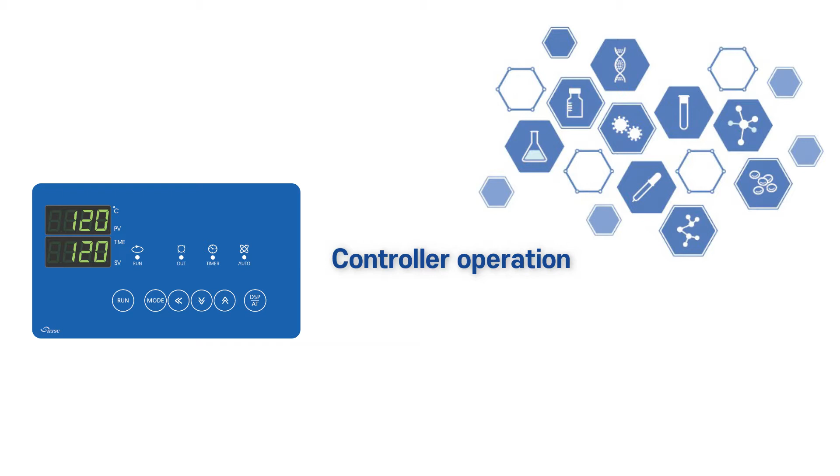This is a guide on how to use each function of the controller. It is a PID controller that is capable of precise temperature control. It is possible to set both temperature and time.

The upper screen displays the inner temperature. The lower screen displays the set temperature. The run lamp displays the operating state of the equipment. The out lamp displays the output state of the heater.

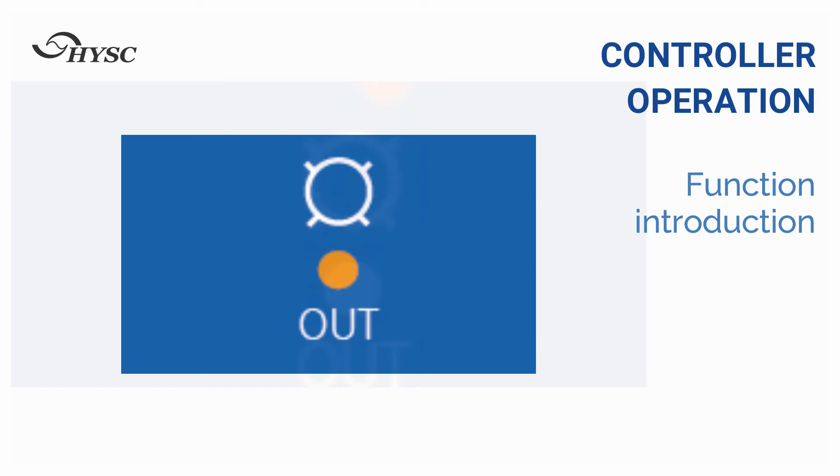The timer lamp displays when the time has been set up. The auto tuning lamp displays when the auto tuning function is activated.

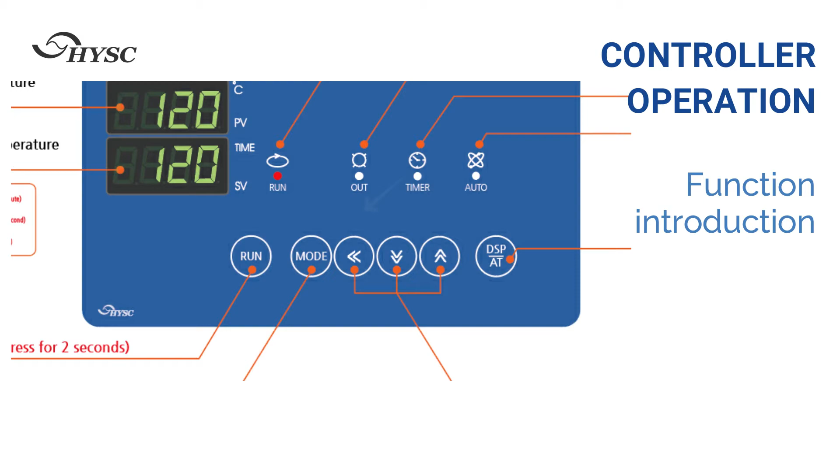The run key is for running and stopping operation. The mode key is for selecting the mode to set temperature and time. There are keys for changing and setting values. This is a key for shifting the digit number, and the other keys are for setting values.

The DSP and AT key is for checking time or running auto tuning. You can check the remaining time by pressing the DSP button during operation if you have set up the time. The AT function is for restoring the original accuracy when you have replaced parts.

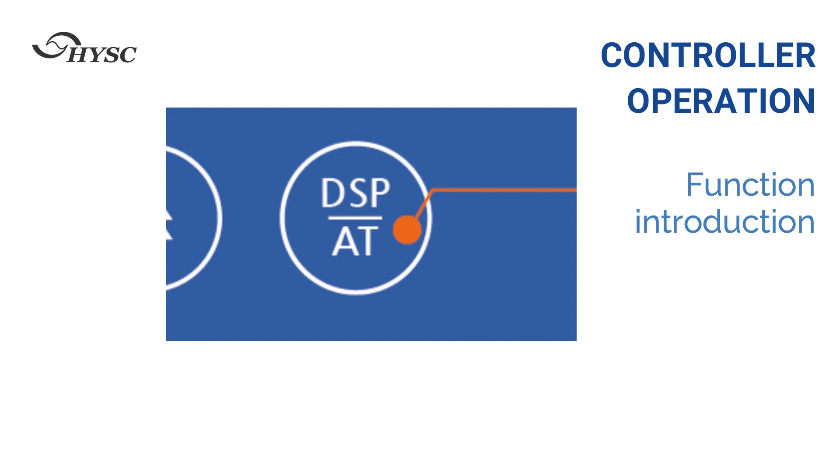There is a function for selecting the time scale. Each time scale available to choose is up to 99 minutes 59 seconds, or 99 hours 59 minutes, or 99 days and 23 hours. The default is set in hours and minutes.

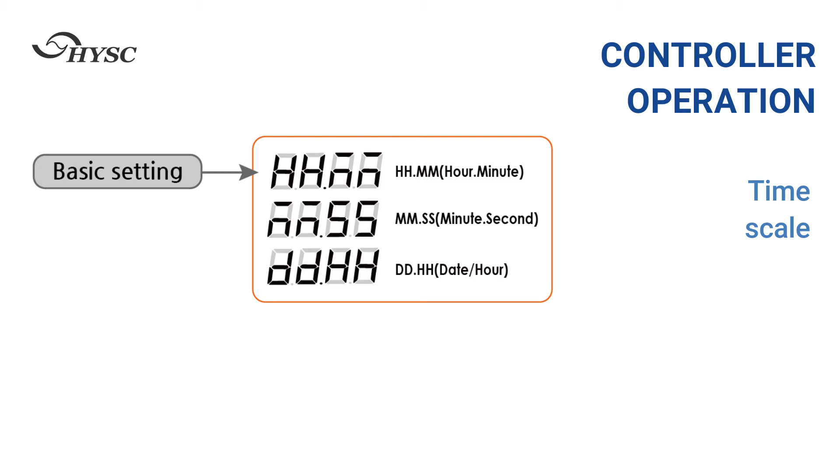This is a guide on how to set the temperature. Press the mode key. Temp mode is displayed in the upper screen. The available setting temperature is displayed in the lower screen. Set your desired temperature using the keys.

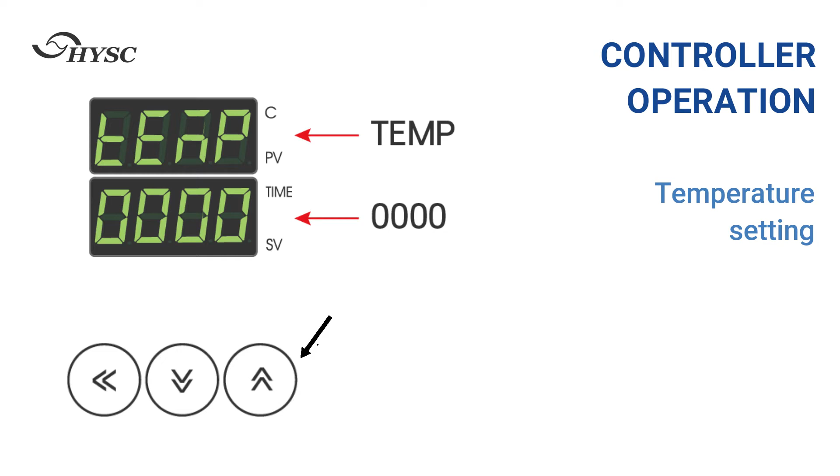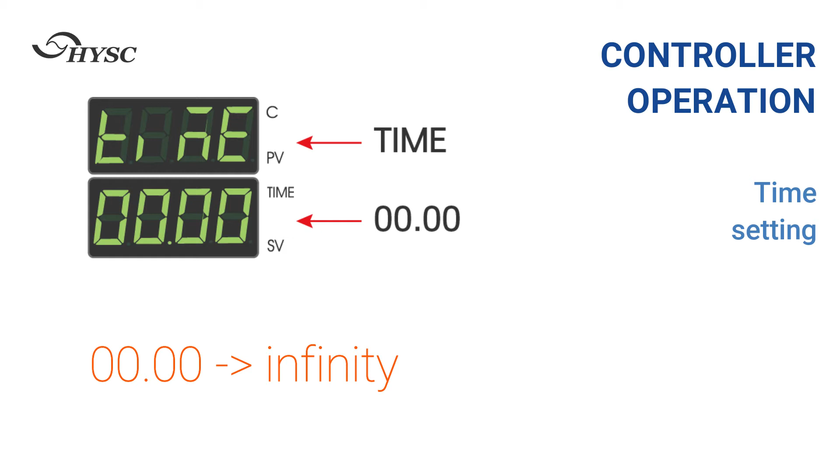The default time is set in hours and minutes. It is possible to set up to 99 hours 59 minutes. You can set the time to 0000 for infinite time. Press the mode key after finishing setting.

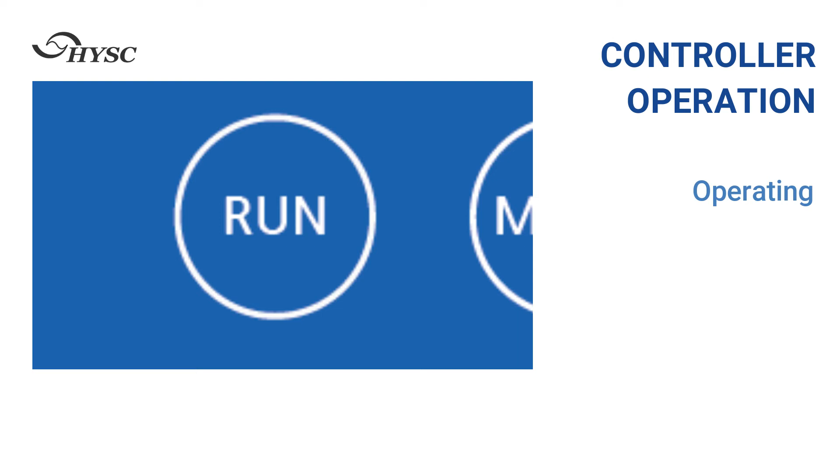This is a guide on how to operate. Press the run key for more than 2 seconds. Operation is started. The run lamp and out lamp are turned on. The timer lamp is turned on if time has been set up.

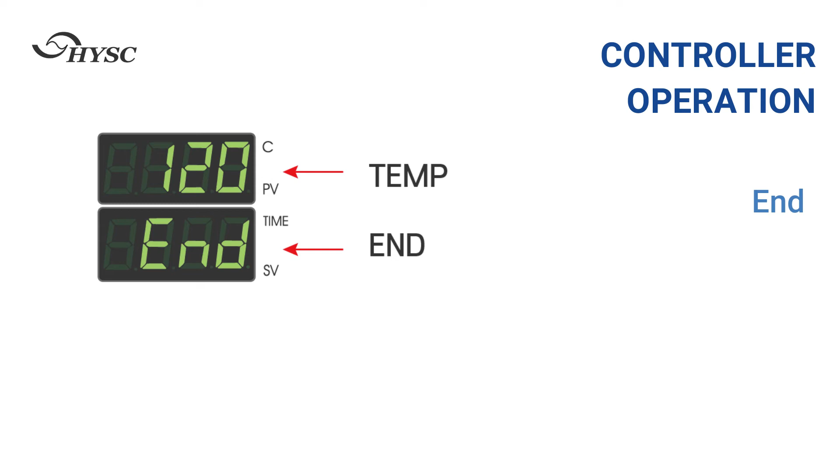This is a guide for ending operation. When the operating time has ended, the run lamp blinks and end is displayed on the screen. And a beep sounds for 30 seconds. If you want to stop the buzzer before 30 seconds, press the run key once.

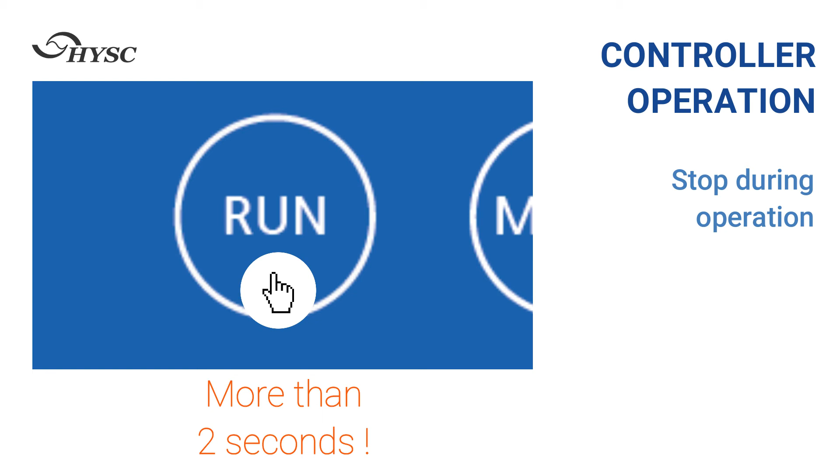This is a guide on how to stop during operation. Press the run key for more than 2 seconds to stop during operation.

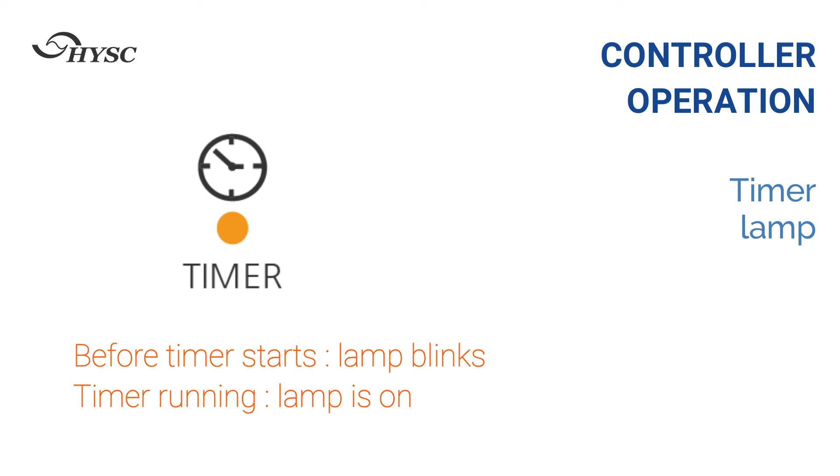This is a guide for the timer during operation. The timer only works during the time within the range of the set temperature, and the period of temperature rising and falling is not included. The timer lamp blinks until it reaches the set temperature. When it reaches the set temperature, the timer lamp stops blinking and turns on. After that, the timer is running. Press the DSP key if you want to see the remaining time.

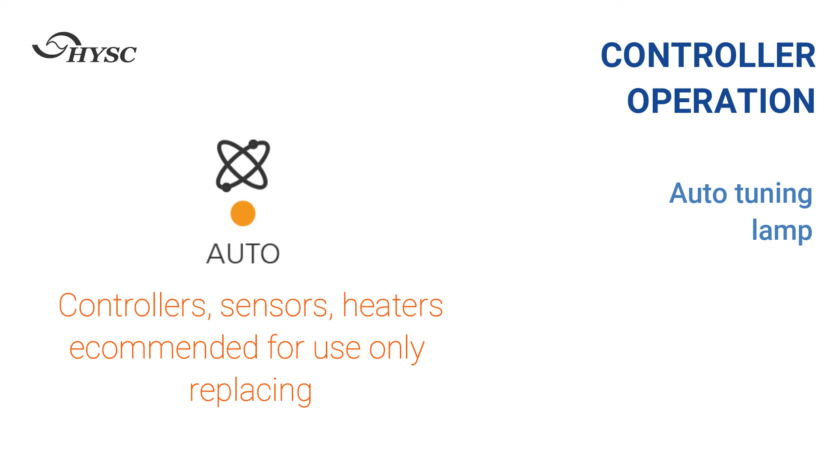This is a guide on how to do auto tuning. Auto tuning is a function that automatically measures and calculates to set the optimal values for PID control. It is possible to run the function even while in use. It is highly recommended to run the function when replacing main parts such as controllers, sensors, and heaters.

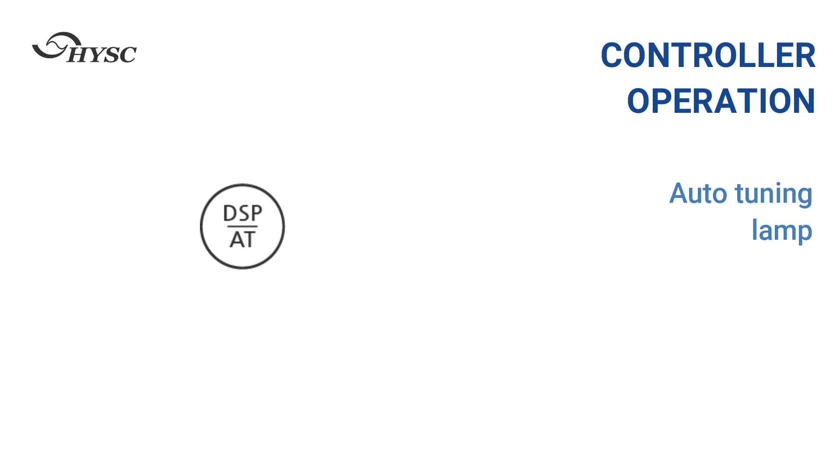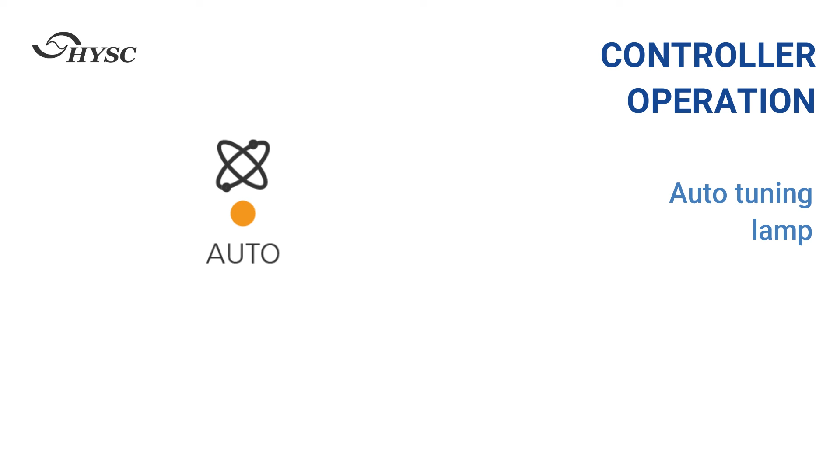Press the AT key for more than 5 seconds after setting the temperature and starting operation. The auto indicator lamp blinks with a beep sound, and then auto tuning is started. The auto indicator lamp turns off after completing the auto tuning. If you want to stop auto tuning while it is running, press the AT key for more than 5 seconds. The auto indicator lamp turns off when auto tuning is stopped.